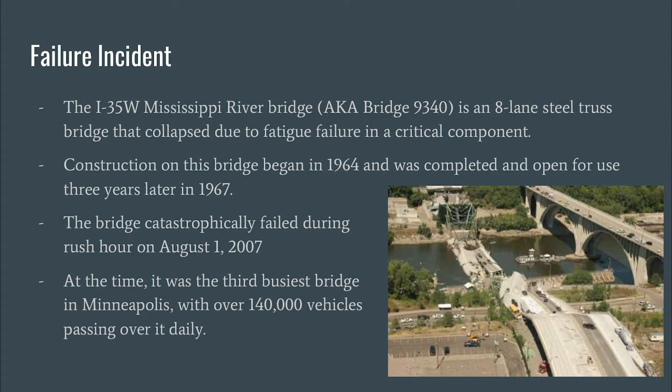Construction on this bridge originally began in 1964 and was completed and opened to the public 3 years later in 1967. During rush hour on August 1st, 2007, the bridge catastrophically failed. At the time that it failed, it was the third busiest bridge in Minneapolis, with over 140,000 vehicles passing over it daily. At 6:05 p.m. on August 1st, 2007, the central portion of the bridge gave way and led to the subsequent collapse of all other sections of the bridge.

As a result, 13 people died and about 145 people were injured. Over 111 civilian vehicles and bridge servicing vehicles were affected by this collapse. Following the incident, Minneapolis had to apply for $65 million in emergency federal aid, and rebuilding the bridge cost them $234 million, eventually totaling over $400 million when accounting for lost revenue due to the accident.

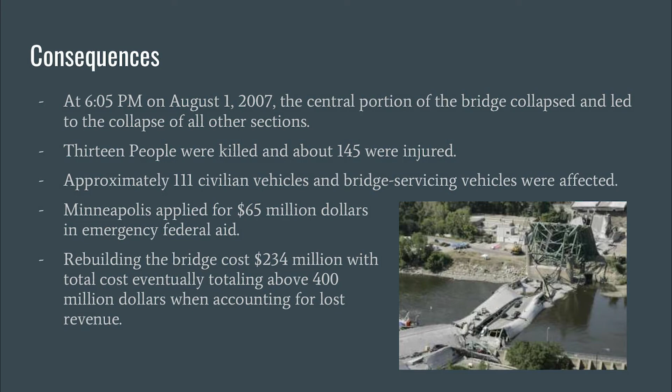Following the collapse of the bridge, Minnesota's governor ordered the inspection of that bridge as well as all similar bridges composed of trusses. A corrosion engineer named William Schutt tested the bridges for de-icing salt, which in a high concentration causes corrosion in the steel of that bridge. Mr. Bazant learned by watching recordings of the bridge. By watching those recordings, he could see that the collapse started near the supports, possibly from gusset failure.

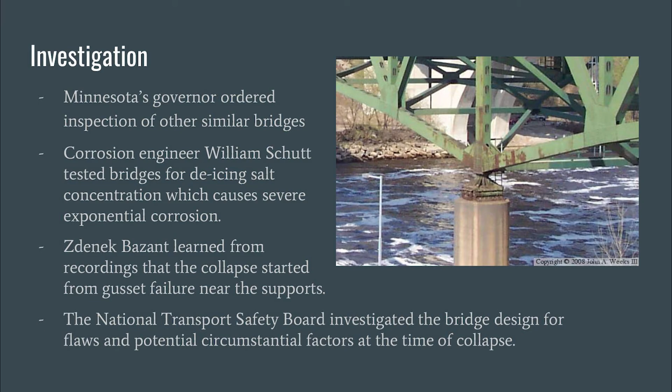In addition, the National Transport Safety Board investigated the bridge design. So they looked at the bridge in concordance with what it's supposed to be designed as to look for any possible miscalculations or wrongfully placed materials or something like that. A major design flaw was what led to the ultimate failure of the bridge. Gusset plates that held the center beams of the bridge together were only half an inch thick when they should have been twice this at a full inch in thickness.

Moreover, at the time the bridge failed, it was rated to be in poor condition by inspectors for over 17 years, and out of 120 points, it only scored a 50 on its structural integrity evaluation. Poor maintenance and ultimately neglect by the Minneapolis Department of Transportation is to blame for this accident. While signs of cracks were not clearly visible in the bridge, this failure could have been prevented with stronger repair efforts by the state.

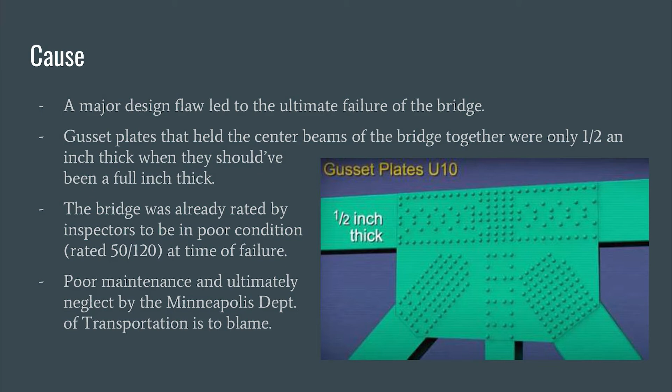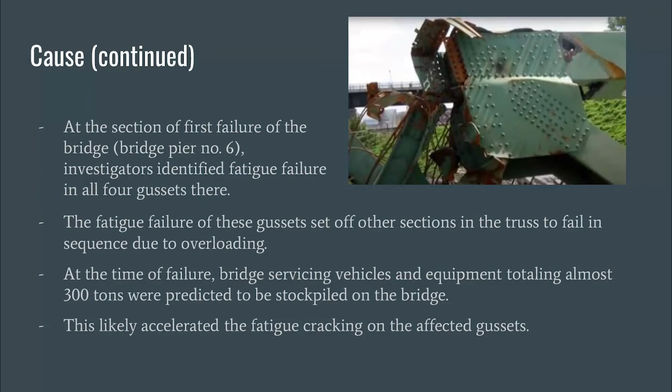At the section of the first failure of the bridge, which was Bridge Pier number 6, investigators identified fatigue failure in all 4 of the gussets that were located there. The fatigue failure of these gussets set off other sections of the truss to fail in sequence due to overloading. At the time of the failure, bridge servicing vehicles and equipment totaling about 300 tons were also reported to be stockpiled on the bridge. This additional loading likely caused the acceleration of the fatigue cracking on the affected gussets.

The solution to the bridge's collapse was a multifaceted one. They began with designing a new bridge that was built with high-strength concrete and lots of sensors that measure the bridge's conditions in real time to monitor it closely. Minnesota also inspected the gusset plates in every truss bridge to ensure that current bridges were not going to undergo the same failure. A $2.5 billion bridge improvement program was implemented that was set to replace or repair all deficient bridges within 10 years of the collapse.

Drones were used to easily inspect hard to access parts of the bridge where typically inspectors couldn't get to. The state of Minnesota ended up repairing or replacing over 138 bridges, and they also identified all the bridges that would require routine maintenance so that they could keep a closer eye on them with new standards.

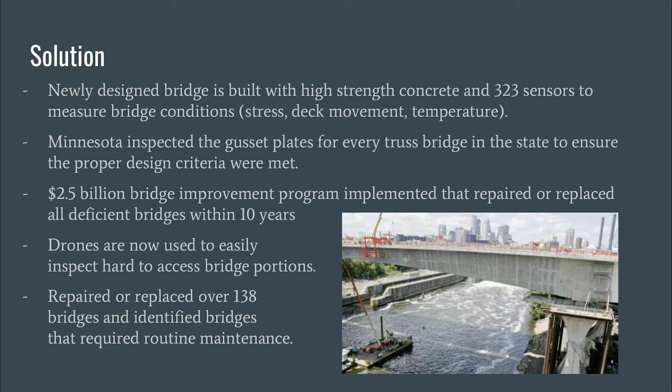The solution brought forth by the state of Minnesota was an all around effective one. By inspecting all of the truss bridges in Minnesota, each bridge that was deemed deficient was given a timeline to be repaired or established a maintenance schedule to keep them functioning properly. Once the state was conscious of the design flaw in the bridge that caused the failure, they could fix it for the rest of the bridges and keep them secure. This was done through the $2.5 billion campaign, and that campaign was successful in rehabilitating or replacing 138 bridges. So it was an all around effective solution.

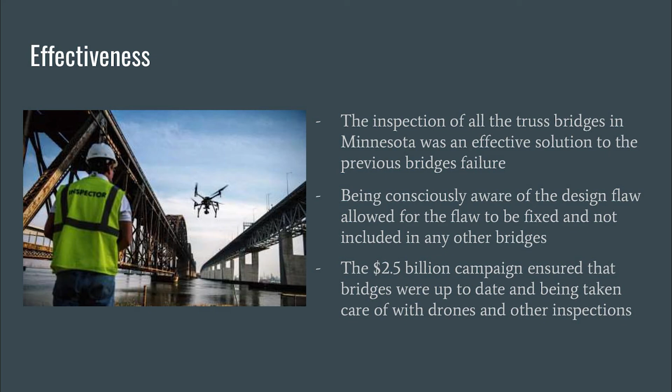One particular aspect of the bridge that plagued it was its susceptibility to vibration. Thousands of cars pass over it all the time, sending little vibrations that weaken the supports and lead to cracks and failures. A proposed design improvement would be through a material called Sorbothane. It's a polymer, and its role is to reduce impact forces. There are statistics that say it can reduce impact force up to 80% at frequencies from 10 to 30,000 hertz. It is weather resistant, so it would last on the bridge.

But its importance is that by reducing those impact forces, it will reduce the vibration and force on the joints and supports of the bridges. So less vibration equals less wear and less fatigue, allowing the bridge to last much longer without cracks. A potential downside of the polymer would be it does not have the strength or resistance to load like steel or concrete would. But if the polymer was placed parallel to the bridge, it would not be taking on any kind of shear components. It would only be under compression, which would lend all the benefits of the vibration reduction without any of the penalties of its non-strength.